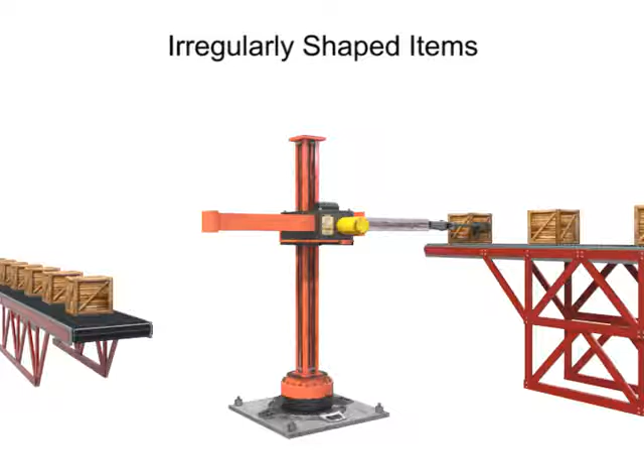There are various ways of lifting irregularly shaped items. While the most common lifting devices in robotic arms are flat-surfaced grippers, these types of devices are most efficient with flat-surfaced workpieces and are not nearly as efficient with round, cylindrical, or other irregularly shaped items.

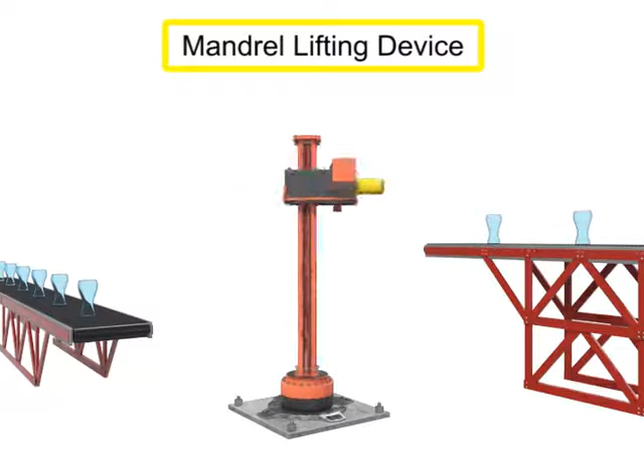When used inappropriately, flat-surfaced grippers can either crush the workpiece or drop a workpiece due to inefficient grip, especially in high-speed operations. A pneumatic mandrel lifting device is used to lift objects that are hollow. The gripping action of a mandrel lift is applied to the interior of the workpiece.

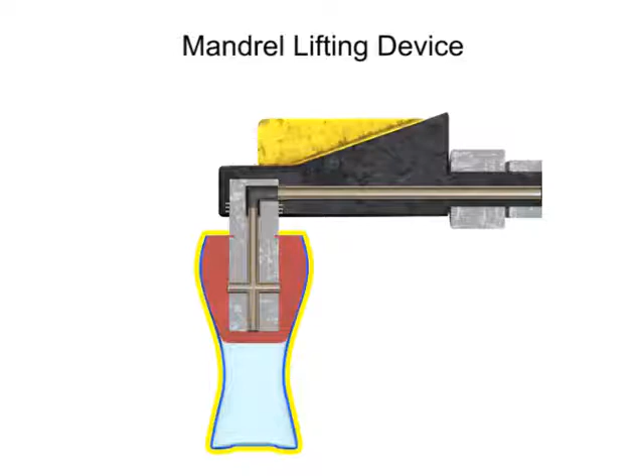Low-pressure air is channeled to a chamber behind a diaphragm. The diaphragm then expands until it is firmly gripping the interior of the workpiece. To free the workpiece, the air is released from the diaphragm, which then deflates, allowing the robot to relinquish the item.

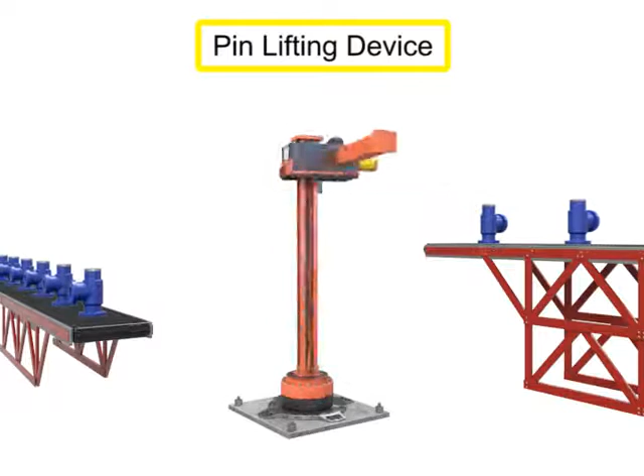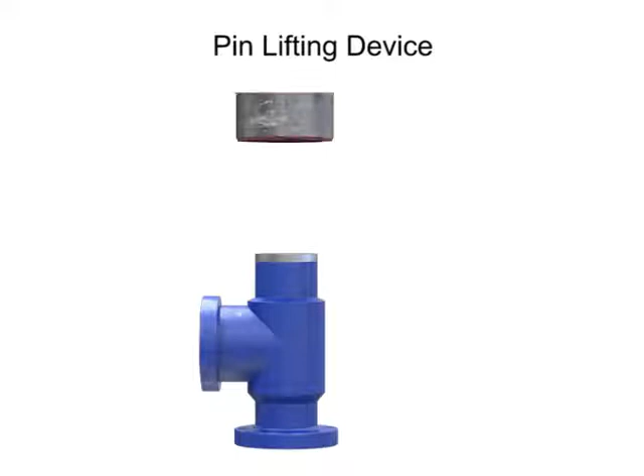Pneumatic pin lifting devices work similarly to mandrel lifting devices. The main difference is the location of the gripping action of the tool. With a pin lifting device, the gripping action occurs on the outside of the part.

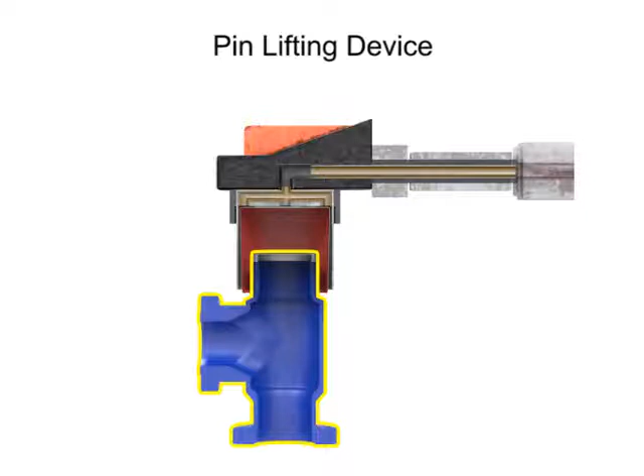As the tool surrounds the workpiece, low-pressure compressed air is used to expand the diaphragm. This ensures a snug grip on the exterior of the workpiece. To free the workpiece, the pressurized air is released, which deflates the diaphragm and allows the workpiece to drop freely.

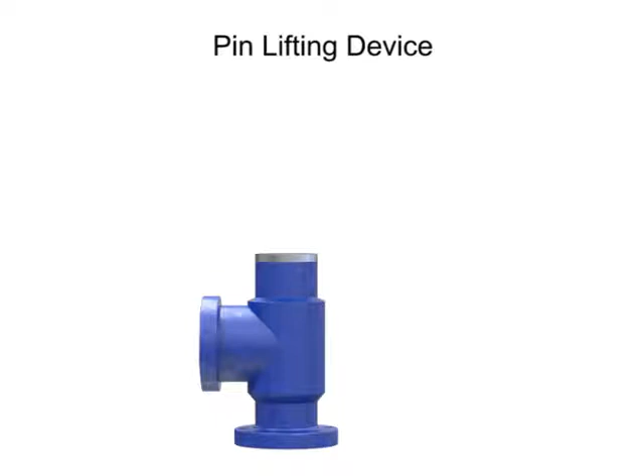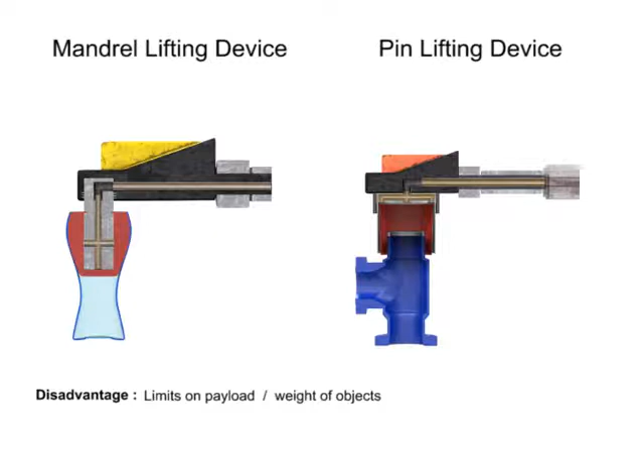The single disadvantage of these pneumatic lifting devices is the limit on the payload or weight which they can lift. However, these flexible pneumatic devices have many advantages, including their light weight, their ability to grip parts without damaging surfaces, and their ability to grip parts with irregular shapes.